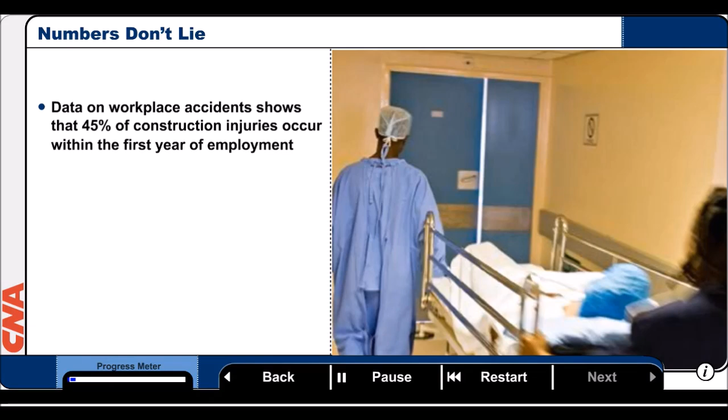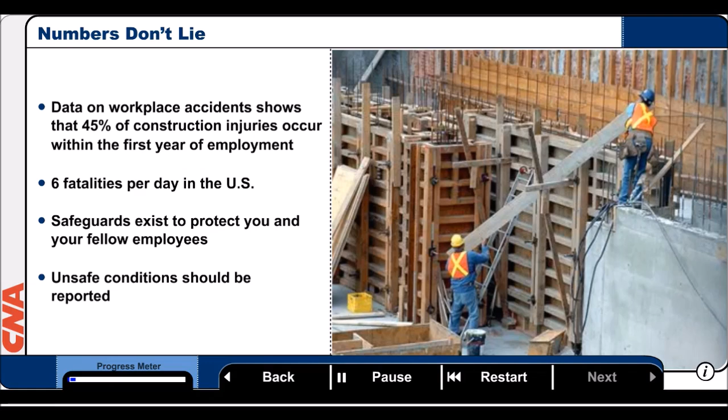While the statistics are alarming, proper safeguards can be employed that will protect you and help ensure you don't become one of those statistics. It cannot be stressed enough that you play a vital role in your own protection. You bear personal responsibility to follow the rules mandated for each job you work on. If you feel a condition is unsafe, or if a task can't be performed in a safe manner, make the effort to notify your supervisor, foreman, and fellow employees immediately. Your and our success depends on it.

Mitigating hazards before work is started each day or before tasks begin is part of our responsibility as an employer. However, arriving each day to the job site prepared to work and outfitted in the right attire is yours.

Ensuring safety and productivity requires that you come to work fit for duty, and that means your attire includes work boots, no tennis shoes, hard-soled at a minimum with a steel toe preferred, work pants, no shorts, shirts with sleeves, hard hats required at all times, work gloves if they're company issued and required, safety glasses, your first pair is company issued, no jewelry of any kind.

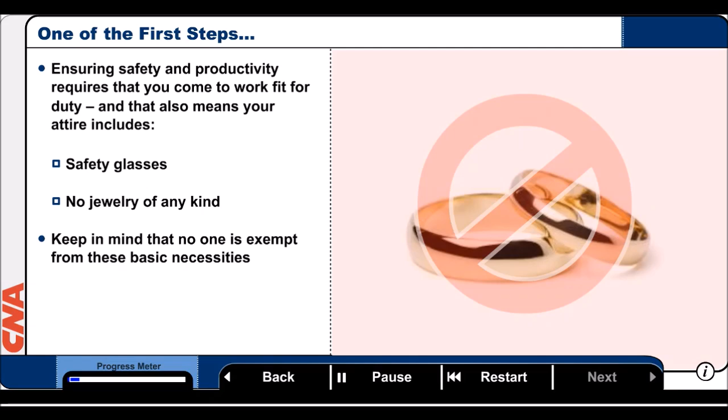Keep in mind that no one is exempt from these basic necessities. This attire and equipment are just the basics for everyday activities. Depending on the tasks you are scheduled to perform and the customers we work for, requirements may be drastically changed. Therefore, each job is different. Whatever the situation calls for, we need to adapt to ensure the safety of everyone who is exposed to job site hazards. Whatever the conditions are, our first priority will be to remove all exposure to hazards.

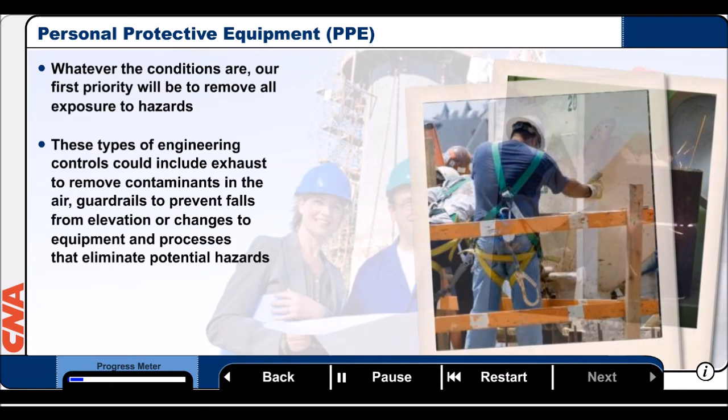These types of engineering controls could include exhausts to remove contaminants in the air, guardrails to prevent falls from elevation, or changes to equipment and processes that eliminate potential hazards.

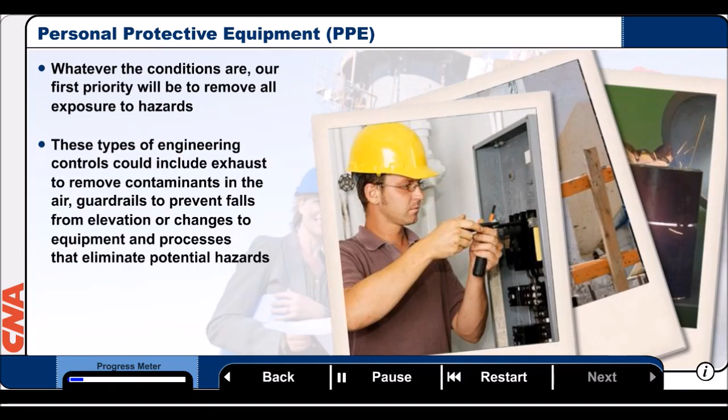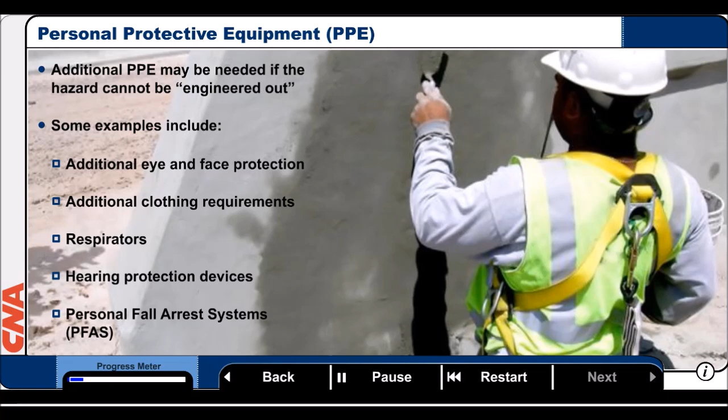Since each instance is evaluated on a case-by-case basis, additional PPE may be needed if the hazard cannot be engineered out. Some examples include additional eye and face protection when grinding or cutting, additional clothing requirements depending on the working environment and job site conditions, respirators if and when airborne contaminants are present, hearing protection devices if noise levels are elevated, and personal fall arrest systems when working at heights such as harnesses, lanyards, and anchor points. If these additional measures are necessary, you will be informed and training will be administered to safeguard you and your coworkers.

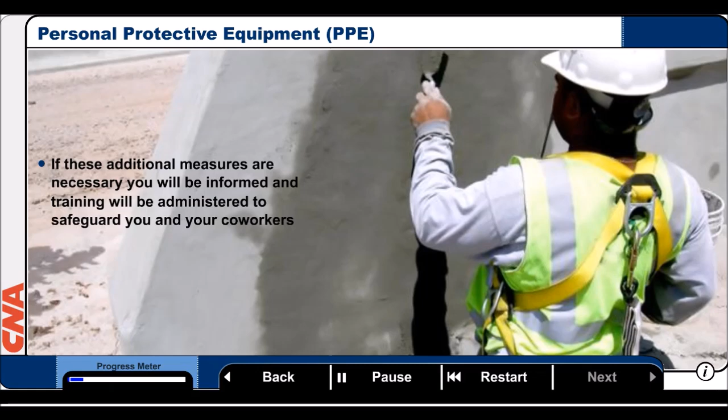Now let's talk about some of the major hazards you may encounter on the job site. The first and probably most critical hazard you'll find while working is heights. Falls from elevation are the leading cause of fatalities in construction. Because of the serious nature of working at heights, our policy is to employ a fall management program anytime you're working 6 or more feet above the ground.

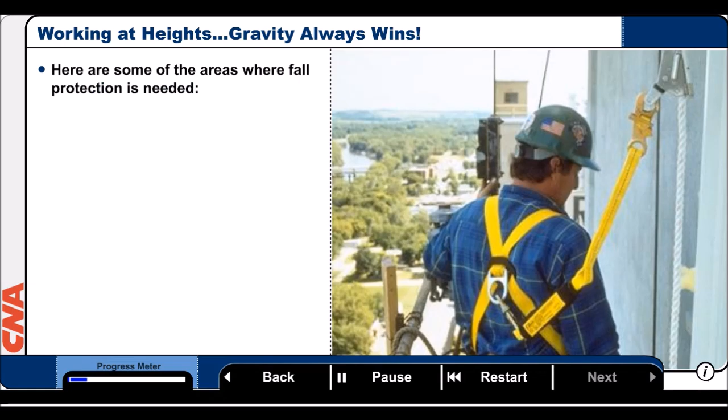Bear in mind that the 6-foot measurement is taken from the bottom of your feet down to the ground or to a machine or other potential hazard below you. Here are some of the areas where fall protection is needed: walkways and ramps, open-sided floors and edges, floor openings and holes, wall openings, excavations, and roofs.

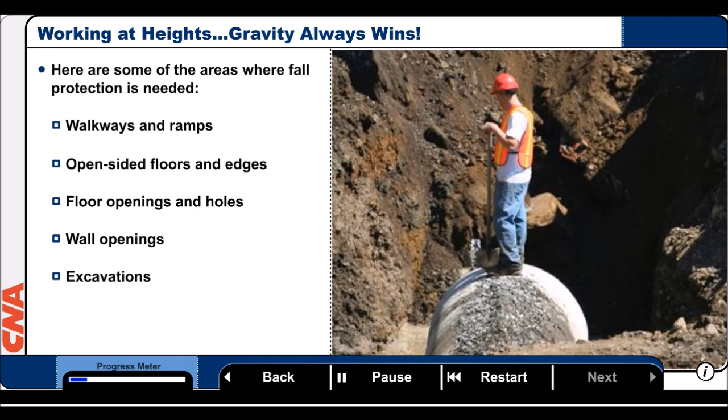That's a lot to keep track of, isn't it? But what you really need to remember is 6 feet. Anytime you're working 6 or more feet above the ground or other hazards, then some form of a fall management system is required.

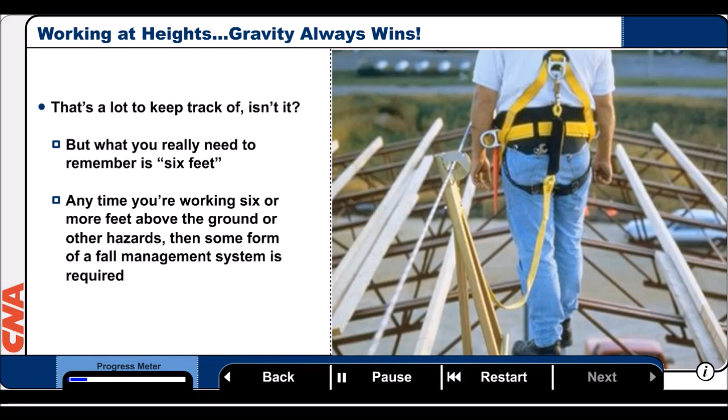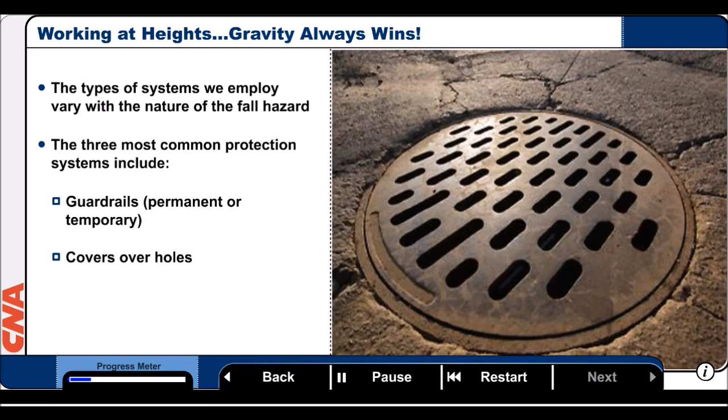The types of systems we employ vary with the nature of the fall hazard. The 3 most common protection systems include guardrails, permanent or temporary, covers over holes, and personal fall arrest systems, PFAS. Other less common systems you may encounter include safety nets and controlled access zones. Due to the requirements of those systems, both on-the-job training and special plans are needed. These would be covered by your foreman at the job site.

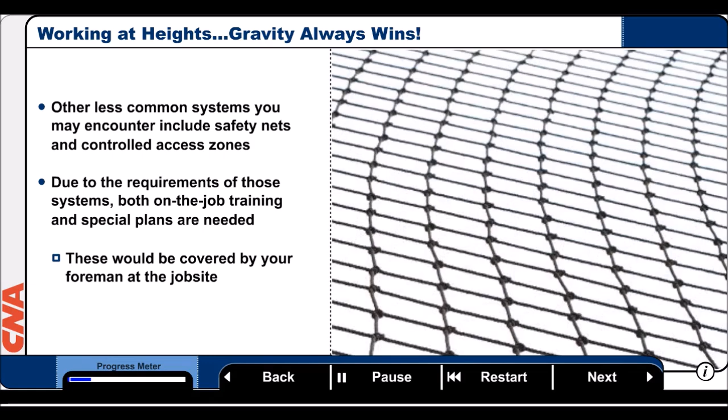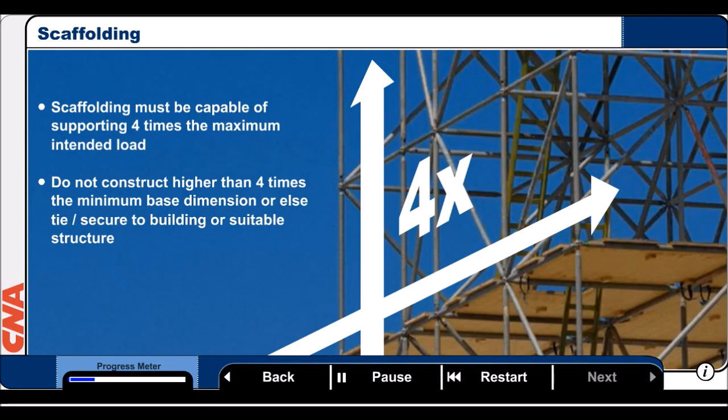When used, scaffolding must be capable of supporting 4 times the maximum intended load. It should not be constructed higher than 4 times the minimum base dimension, or else it should be tied and secured to a building or other suitable structure.

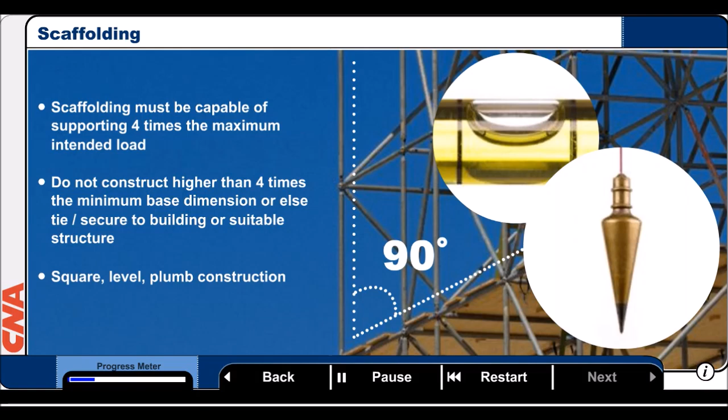Scaffolding must be constructed square, level, and plumb. When the first tier of scaffold is erected, check for plumbness and continue doing so as the scaffold is built. Base plates should be used for uprights. They should be secured or nailed to mud sills.

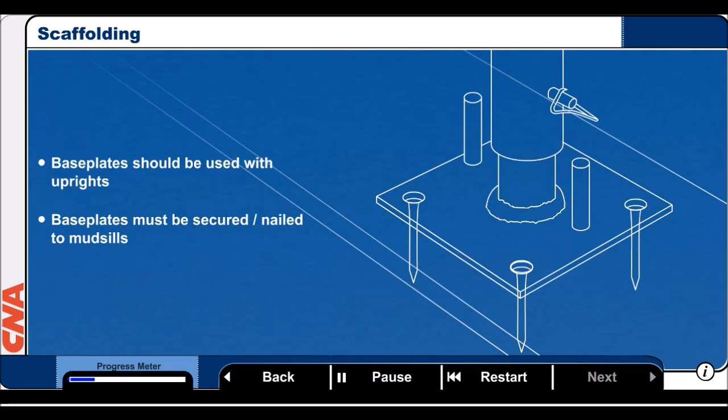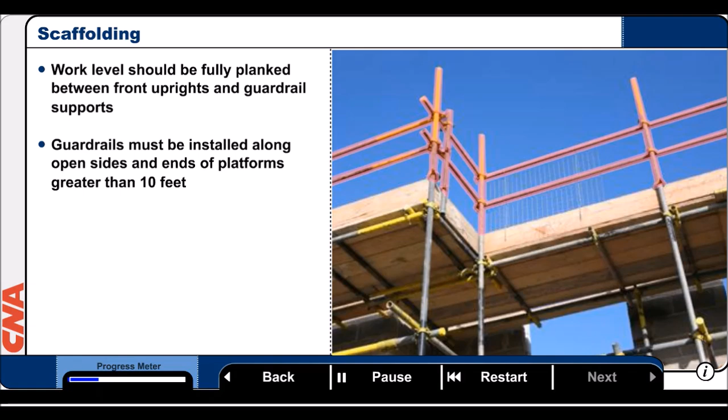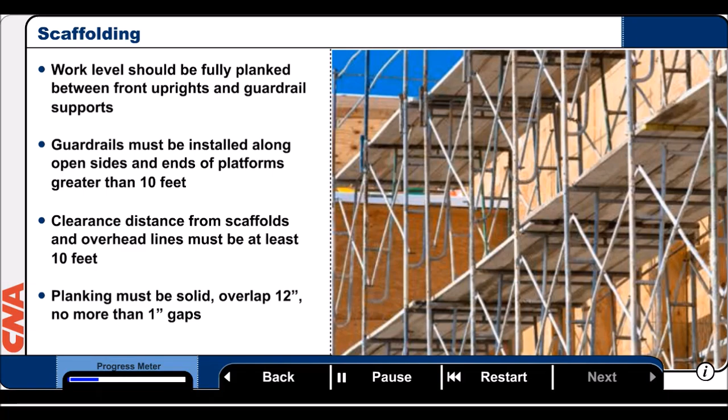The work level on a scaffold should be fully planked between the front uprights and guardrail supports. Guardrails should be installed along the open sides and ends of platforms greater than 10 feet. The clearance distance from scaffolds and overhead lines must be at least 10 feet, and planking must be solid with a 12-inch overlap and no more than 1-inch gaps.

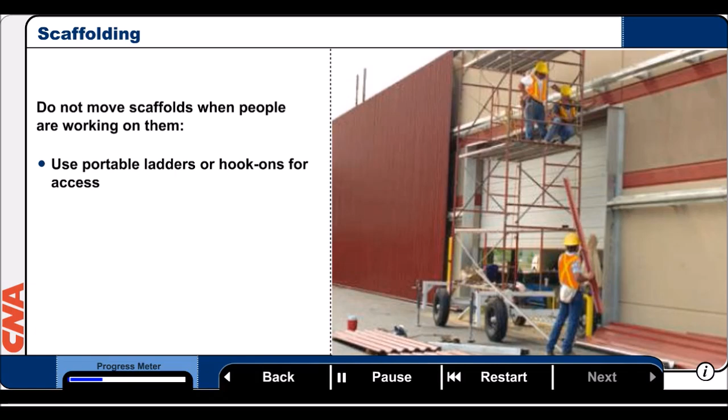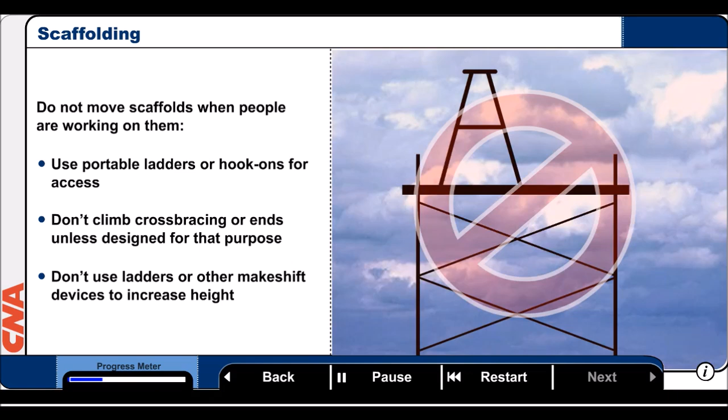Scaffolds should never be moved when people are working on them. Portable ladders or hook-ons should be used for access. Do not climb the cross-bracing or ends of a scaffold unless they have been designed for that purpose. Do not use ladders or other makeshift devices to increase height on platforms.

Erectors and dismantlers need to be aware that scaffolding presents significant fall hazards during assembly or dismantling before the guardrail or other fall protection can be established. To reduce fall hazards and to meet 100% fall protection requirements for the project, personal fall protection must be used by workers erecting and dismantling scaffolding as far as it is practical.

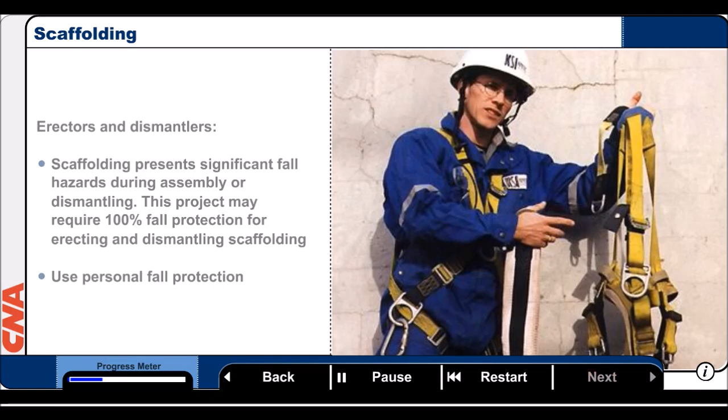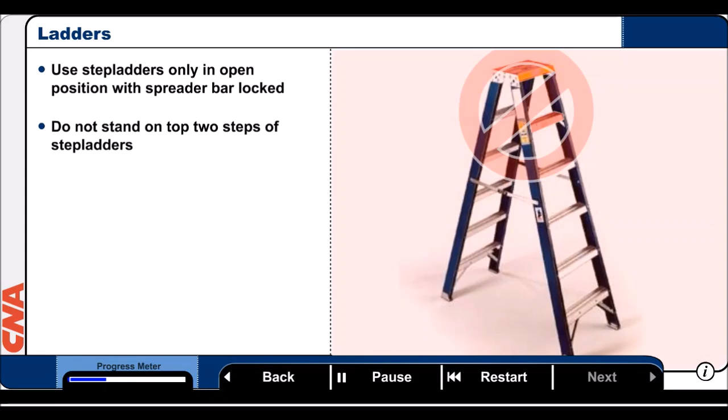Ladders. Step ladders should be used only in the open position with the spreader bar locked, and never stand on the top 2 steps of step ladders. The side rails of a ladder should extend at least 3 feet above the upper landing surface. Ladders must be used at an angle of 4 to 1, vertical to horizontal, and they should be tied or secured at the top to prevent tipping.

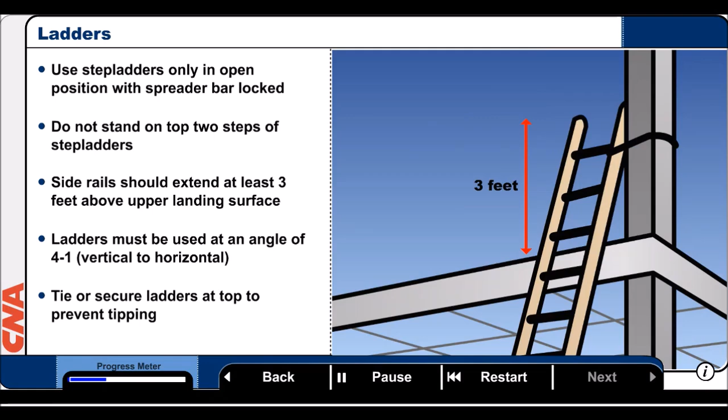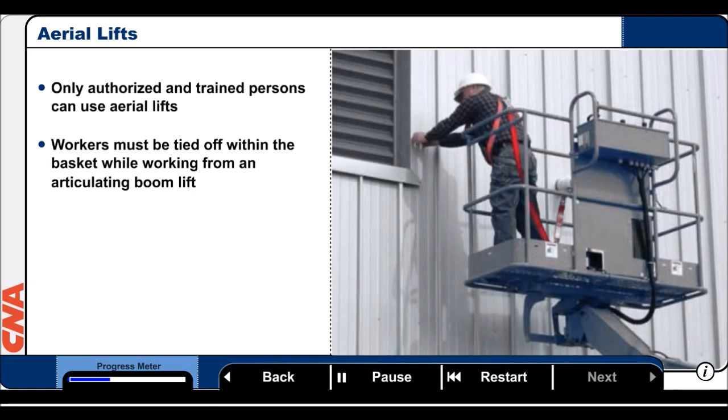Aerial lifts. Only authorized and trained persons are allowed to use aerial lifts. Workers must be tied off within the basket while working from an articulating boom lift. Use aerial lifts to raise personnel into work position. Chains or guardrails for the ends of scissor lifts should be enclosed while in use.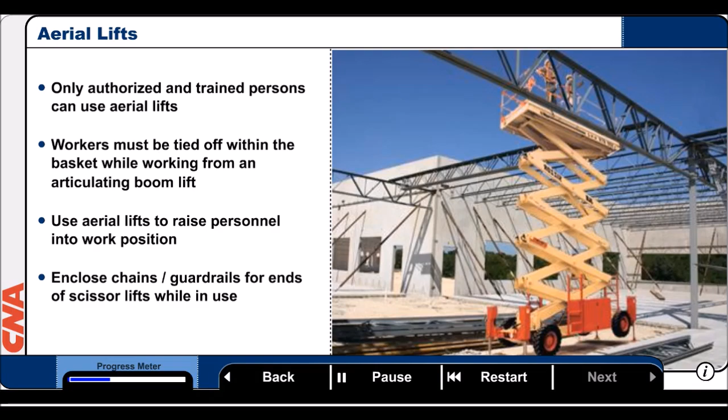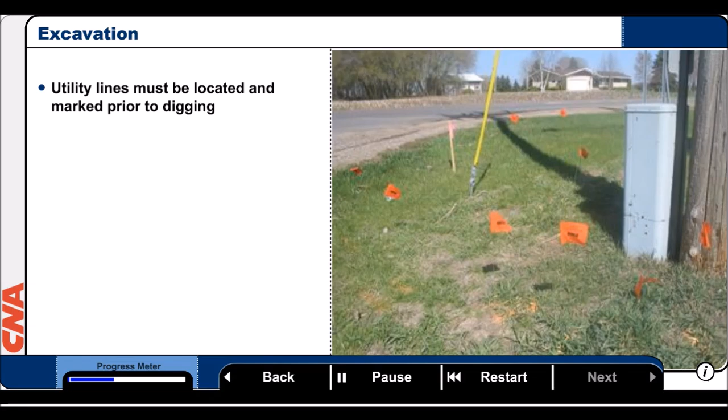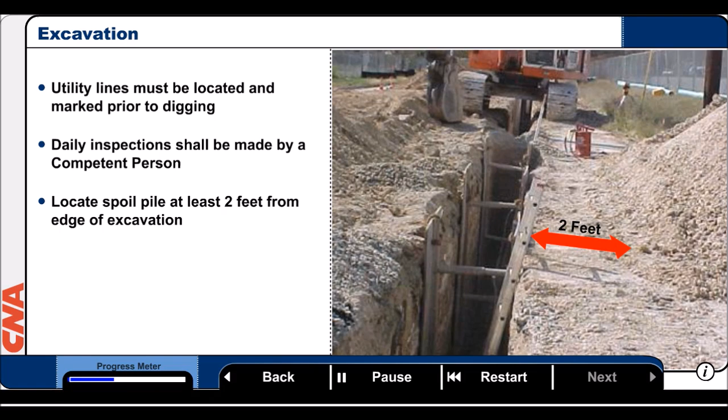Here are some safety points to keep in mind during excavations. Utility lines must be located and marked prior to digging. Daily inspection shall be made by a competent person, such as a supervisor or someone trained in inspection. The spoil pile must be located at least 2 feet from the edge of the excavation.

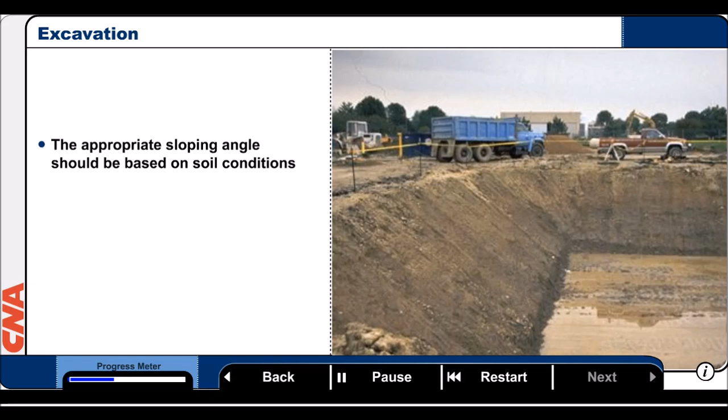Sloping or shoring must be used in excavations deeper than 5 feet to prevent cave-ins. The appropriate sloping angle should be determined based on soil conditions. And there must be a suitable means of exit, also called egress, from the excavation, usually a ladder, for every 25 feet of lateral travel.

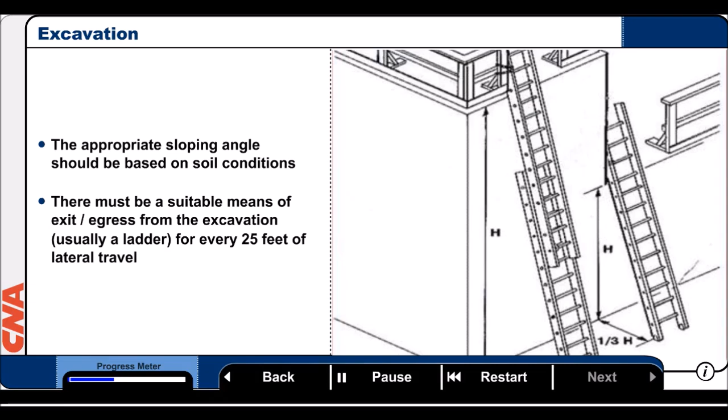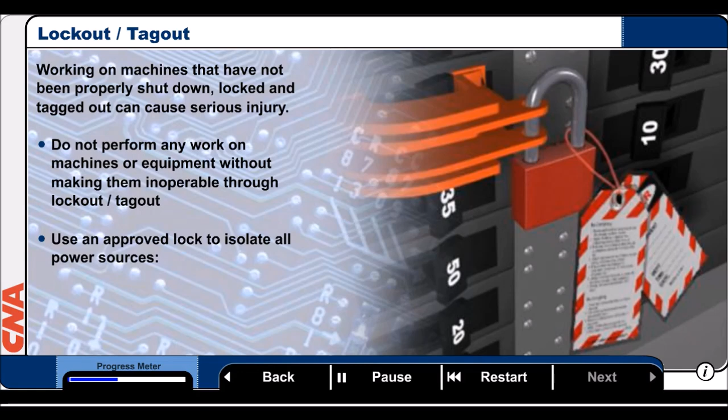Lockout tagout. Working on machines that have not been properly shut down, locked, and tagged out often results in serious injury. We do not allow any work to be performed on machines or equipment without it being made inoperable through our lockout-tagout procedures. You are not permitted to work on any machines or equipment without first using an approved lock to effectively isolate all power sources.

Understand that there may be multiple energy sources within one piece of machinery. You must also attach a tag with your name and any other information we require on the tag. This is to let us know exactly who has the equipment locked out and why. For work requiring multiple personnel, each worker should apply their own lock to a multiple locking hasp. Finally, you are the only person authorized to remove your lock and tag after you have completed your work. If you are unavailable, your supervisor may remove your lock.

Heavy equipment. When working with or around heavy equipment, a number of precautions can reduce your risk of injury. Always conduct a pre-trip inspection, and be sure to wear a seat belt when operating heavy equipment.

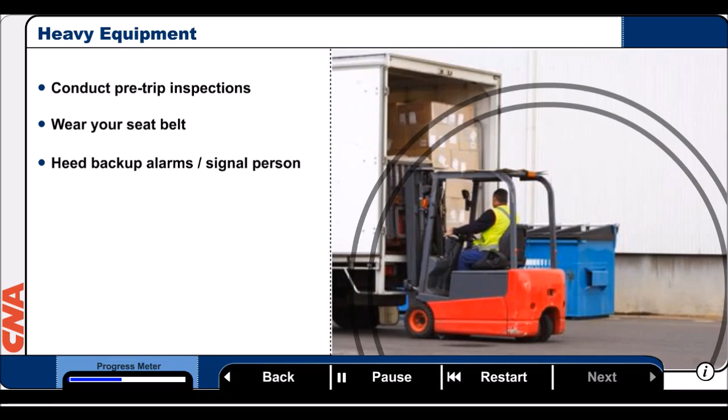Pay attention to backup alarms, whether on the ground or in a vehicle, and use a signal person in areas of heavy traffic. If you are working on the ground around heavy equipment, be sure to wear a high-visibility garment so that you can be easily seen. Before approaching heavy equipment, you should always communicate with the operator using your voice or another recognizable signal so that he or she is aware of your presence.

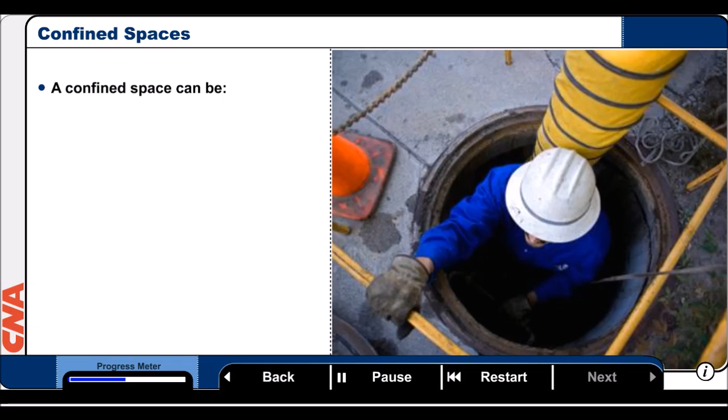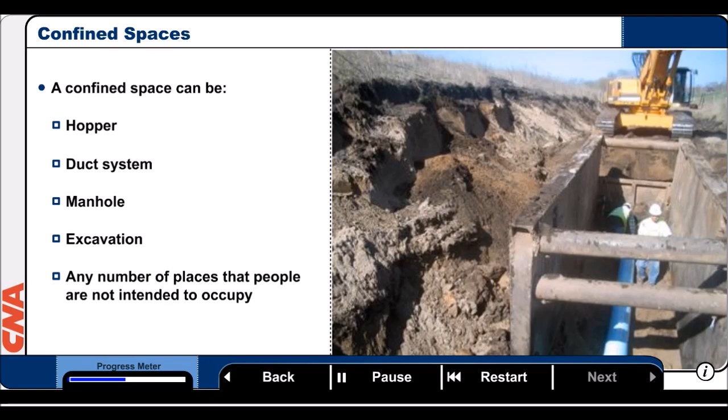Confined spaces are places that are not designed for continuous occupancy, have no easy way to enter or exit, and have the potential for hazardous atmospheres. A confined space can be a hopper, duct system, manhole, excavation, or any number of places that people are not intended to occupy. For confined spaces that have moving equipment, the equipment must be made inoperable.

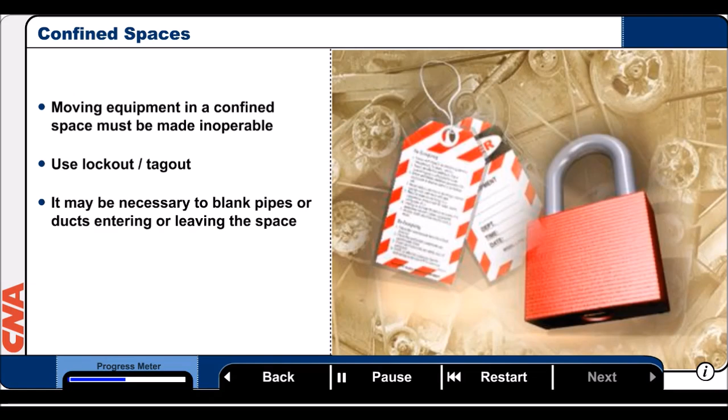This will involve lockout-tagout of all power sources. To prevent materials from entering the space, it may be necessary to blank pipes or ducts entering or leaving the space. Air testing must be performed prior to any work being done to be sure there is sufficient oxygen and there is no toxic gas that could be inhaled.

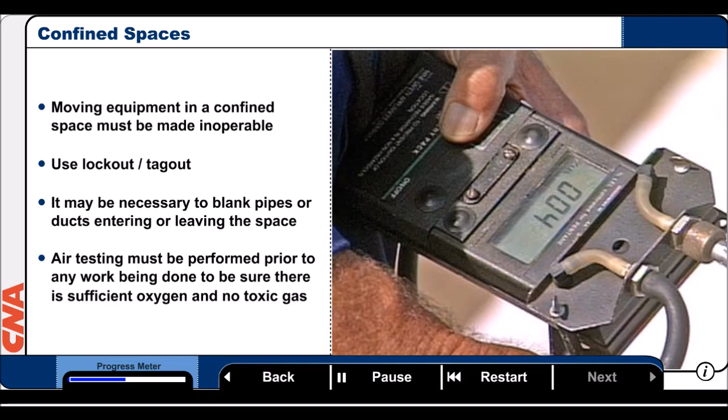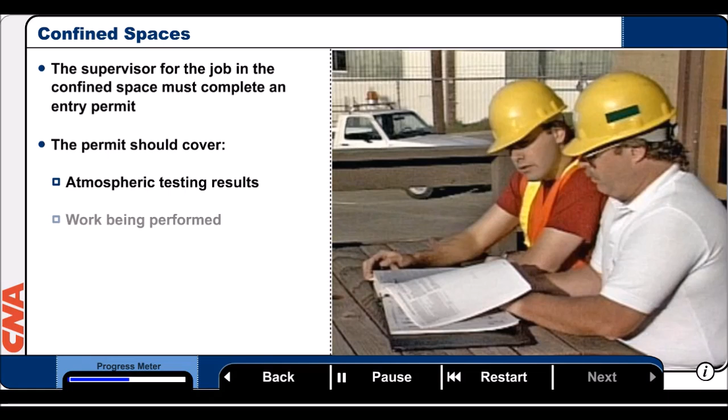The supervisor for the job in the confined space must complete an entry permit. This permit should cover some or all of the following items: the names of workers assigned to enter the confined space, the name and position of the person who is authorized or in charge, a description of the hazards known or expected to be present in the confined space, atmospheric testing results done before and during the entry period, the work being performed, the PPE required, and the rescue procedures.

The permit is only good for the duration of one shift. If the work takes longer than that, another permit must be filled out. There must be an attendant standby person in communication with every person inside the confined space at all times.

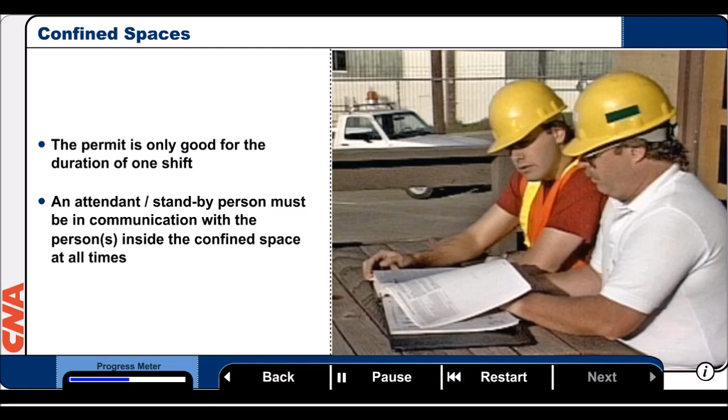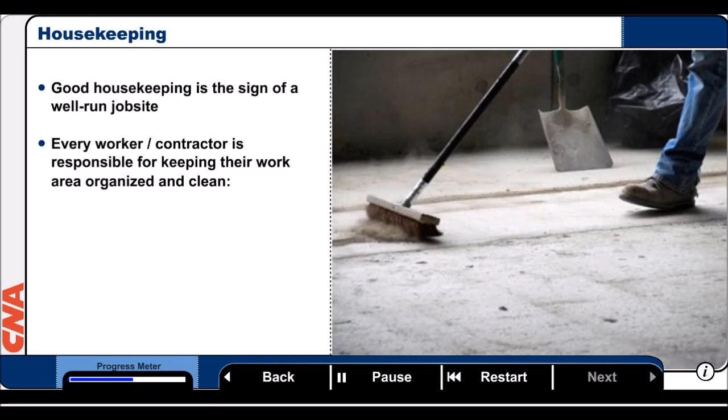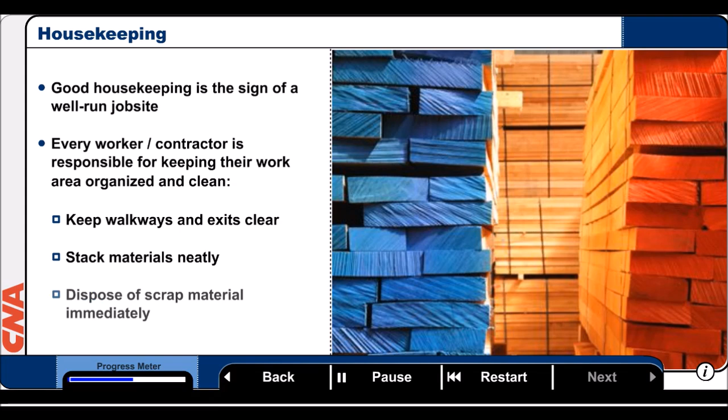Housekeeping. Good housekeeping is the sign of a well-run job site. It is the responsibility of every worker and contractor on site to keep their work area organized and clean. Keep walkways and exit areas clear of all construction materials and refuse. Materials should be neatly stacked, and scrap material disposed of immediately to reduce the risk of injury from slips, trips, and falls.

Our housekeeping rules apply to contractors, too. Contractors who fail to meet housekeeping requirements will be billed for cleanup costs.

Chemicals on site. All chemicals brought onto the job site must be identified and approved, and there must be a Material Safety Data Sheet, MSDS, for each one. If you use containers other than the one the chemical came in, you must label the container or use the chemical immediately.

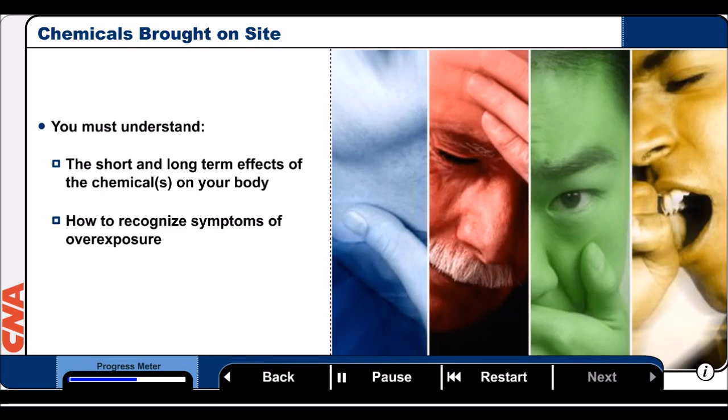It is important that you understand the short and long-term effects of the chemicals on your body, how to recognize symptoms of overexposure, and what PPE is required to protect yourself. Consult the MSDS or check with your supervisor for this information.

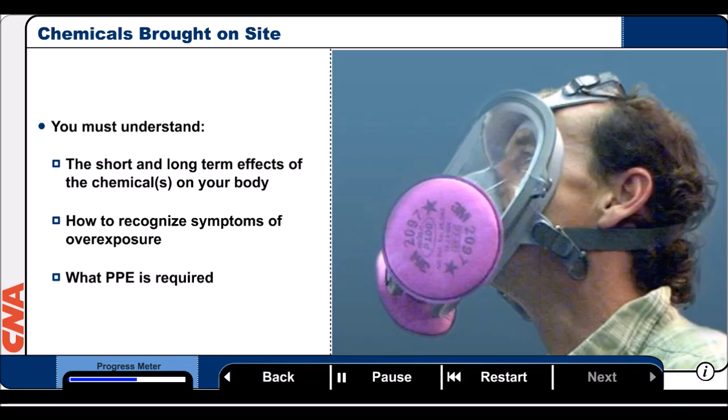Fire protection. Fire extinguishers are posted and made available for every 3,000 square feet of work area. These extinguishers are located in key locations near columns or stairwells. They are located in designated areas, identified by red markings and labels, and elevated within clear view.

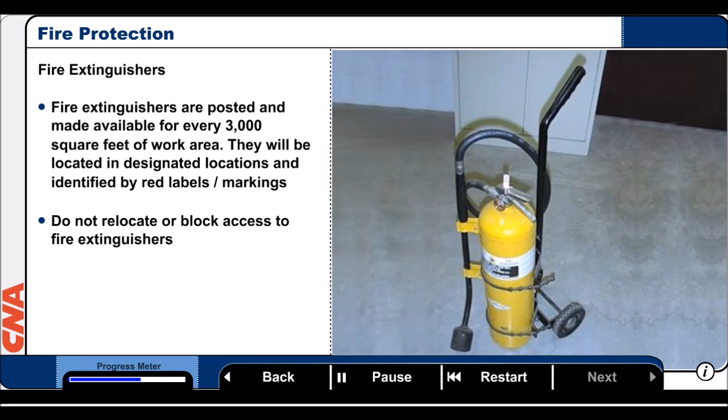Do not relocate or block access to fire extinguishers. If you use a fire extinguisher, report it immediately to the general contractor so that it can be replaced. Keep fire extinguishers in your immediate area during all hot work operations.

Ready for a quick quiz on what we've covered so far? Select the correct answer to each question as it appears.

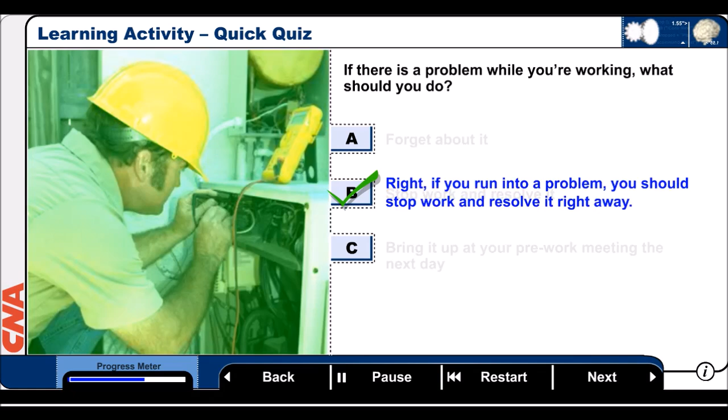If there is a problem while you're working, what should you do? A. Forget about it. B. Stop work and resolve it. Or C. Bring it up at your pre-work meeting the next day. Right, if you run into a problem, you should stop work and resolve it right away.

A visitor shows up for a site tour wearing shorts and sandals. Can he come on site? A. Yes. Or B. No. Right. Our clothing rules apply to all personnel on site, including suppliers and visitors.

What percentage of the time should hard hats be worn on a construction site? A. 100%, B. 95%, or C. 80%. Yes, hard hats should be worn 100% of the time.

What's the sign of a well-run job site? A. Smiling workers, B. Piles of scrap materials, or C. Good housekeeping. Yes, good housekeeping is a sign of a well-run job site.

There must be a current blank for all chemicals brought on site. A. CFR, B. CSS, C. OSHA, or D. MSDS. Right, all chemicals brought on site must have an MSDS or Material Safety Data Sheet.

What should you never relocate? A. A fire extinguisher, B. A chemical container, or C. Safety goggles. That's right, never relocate a fire extinguisher.

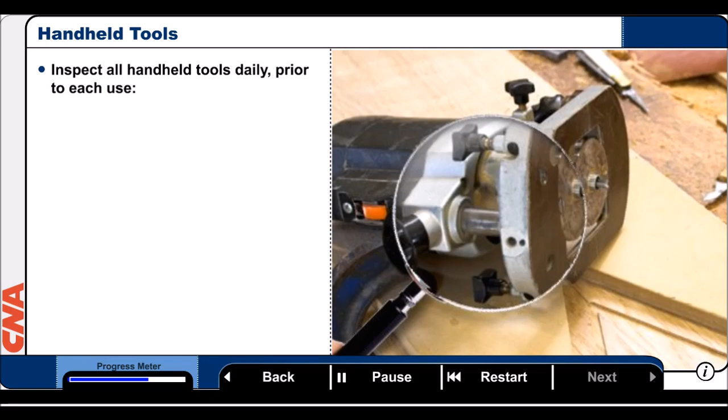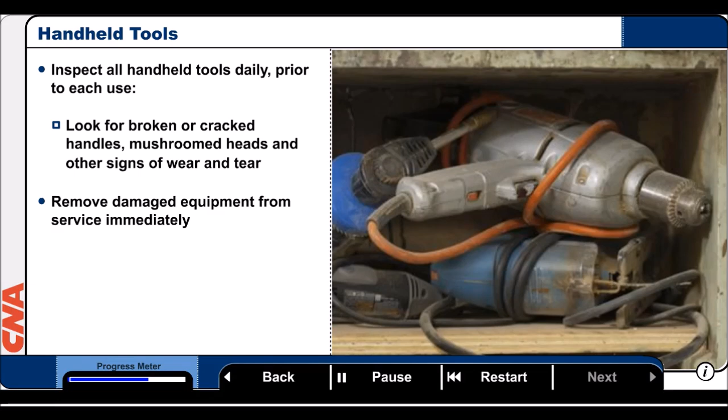Handheld tools. To prevent injuries and accidents, you should inspect all handheld tools daily before using them. Look for broken or cracked handles, mushroomed heads, and other signs of wear and tear. Damaged equipment should be removed from service immediately. Always use the right tool for the job, and use tools only for their intended purpose or design.

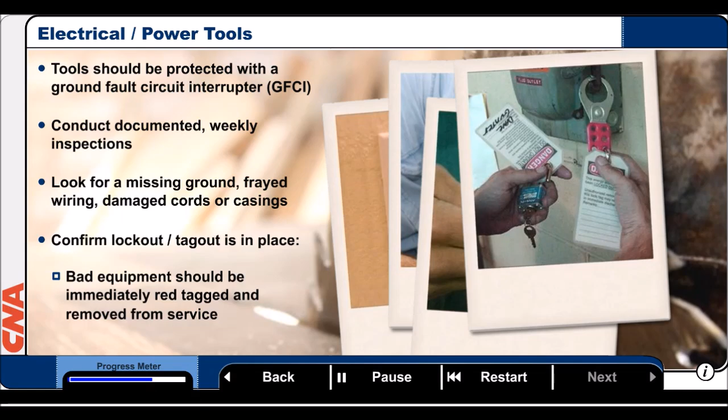Electrical and power tools. When using power tools, make sure they are protected by a ground fault circuit interrupter, known as a GFCI. There should be documented weekly inspections of all power tools. When inspecting tools, look for a missing ground, frayed wiring, or damaged cords or casings. Confirm that lockout-tagout is in place. Bad equipment should be immediately red tagged and removed from service.

In addition to the hazards involving power tools, also be aware of electrical hazards associated with coming into contact with power lines. Watch for overhead lines and relocate when necessary. Crane booms should be kept at least 10 feet away from overhead lines.

Good communication is key to preventing injury and accidents. For this reason, a pre-work meeting should take place at the beginning of the day and any time the work phase changes or as needed. The meeting should discuss the work to be performed, as well as expectations and responsibilities of all workers within the crew.

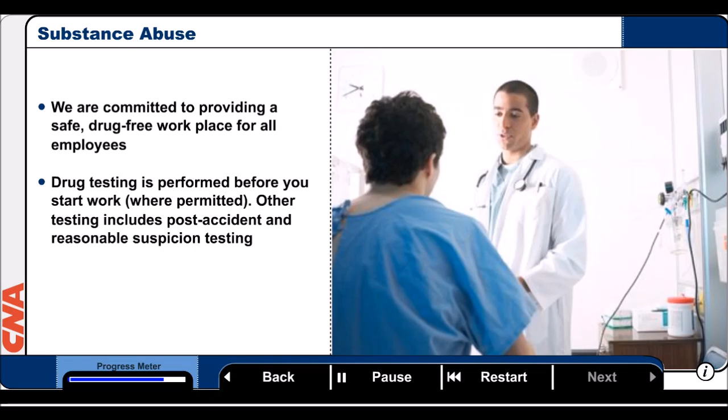Let's look at just a few more rules before we finish our training. Substance abuse. We are committed to providing a safe, drug-free workplace for all employees. Drug testing is performed, where permitted, for all workers before they start work. Other testing includes post-accident and reasonable suspicion testing.

The use of alcohol or illegal drugs goes against our goal of reaching the highest standards of employee performance, safety, and health. Workers who abuse alcohol or drugs threaten their safety and the safety of those around them. This is something that cannot and will not be tolerated.

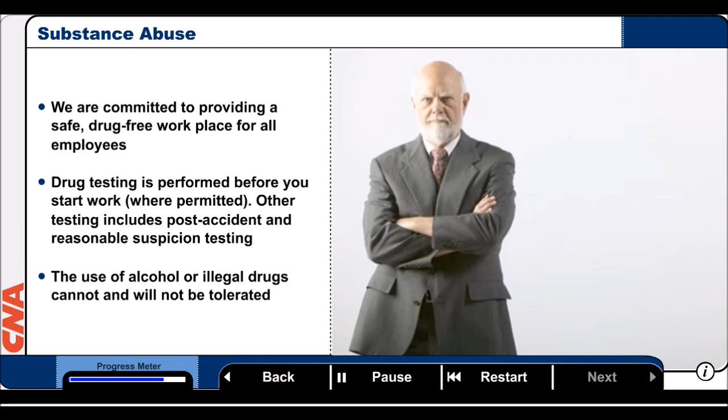If you suspect anyone on the job may be working while under the influence of alcohol or drugs, please notify your supervisor immediately. If an accident should occur, it is your responsibility to report it immediately. In fact, if anything looks wrong, report it to your supervisor.

This module has given you an overview of how we expect you to work safely while you are on our site. If work conditions change unexpectedly, work should be temporarily stopped and a brief on-the-spot meeting held where safety issues should be addressed with all affected workers. Any worker or supervisor is encouraged to call such a meeting when an issue arises.

We do not want you to assume anything about the job. If you have doubts about any aspect of your work here, ask your supervisor or contact the general contractor.

Let's conclude our orientation with a summary of what you've learned. First of all, we are required to provide a safe workplace. We will not ask you to perform any task that will put you, your company, or any other workers at risk. We have a site-specific safety program in place.

We try to eliminate or reduce hazards through engineering practices, but when this is not feasible, we tell you about the hazards and how to protect yourself from them.